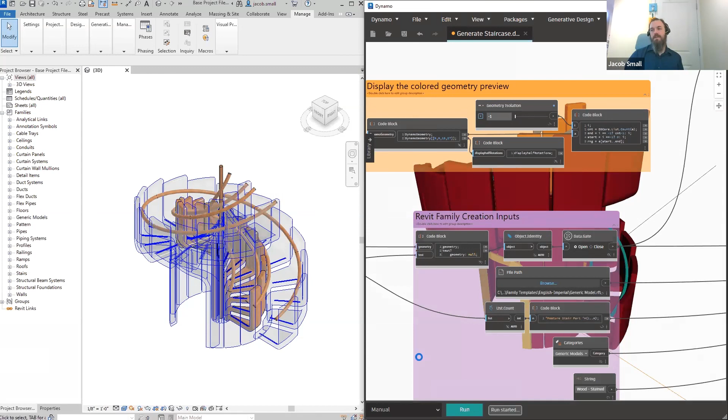All right, so last time on Dynamo Office Hours, because this is a continuation of the series, this is what we put together. We built a graph that would basically write all this up. I've sped this up a little for anybody who saw the last version, it did not go quite that quickly, but it did get all of that geometry created. I've pushed it a little further and took the lighting recesses and actually baked them in as well. We'll have a quick tour of the model when we get started and look at the actual demo portion of today's session.

All right, so we're going to talk through a handful of documentation pieces inside of Revit, in this case looking at all the cool stuff and starting with views. There's a little bit of nuance when it comes to the Revit API, and that is expressed in Dynamo as well. So the way that you build some of these things we're going to talk about are going to be conceptually a little different to the way that you might engage with them using buttons inside of Revit to do the same actions.

Because there are different ways to create views, you need to define how you're going to create that view. Some of these could be things like by level or by target in the context of a 3D view. You can conceptualize a 3D view being more like a camera - you have to say where it is, where it's pointing to, and what is the frame of reference that sits inside of that view.

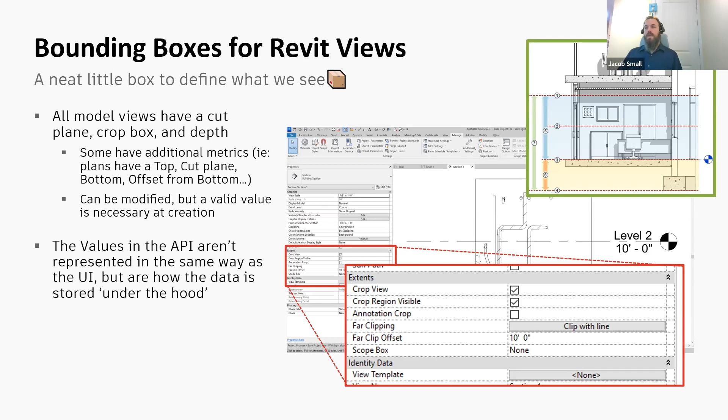To explain this, I started by drawing my best impression of a Monopoly house in Dynamo using as few nodes as possible. Any view, before we can create the view, we have to have something to look at.

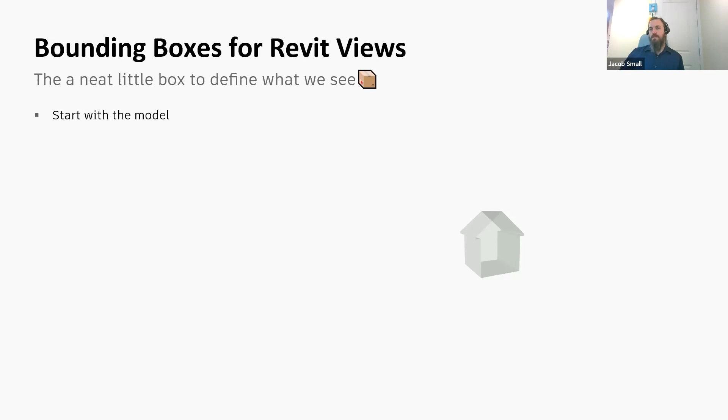So we're going to look at this house. And then we're always going to start by defining a cut plane. This is going to be defined by a coordinate system where the normal of the plane is going to be the coordinate system's z-axis, right? So that means our cut plane is always going to be that XY plane, right? You can see it there.

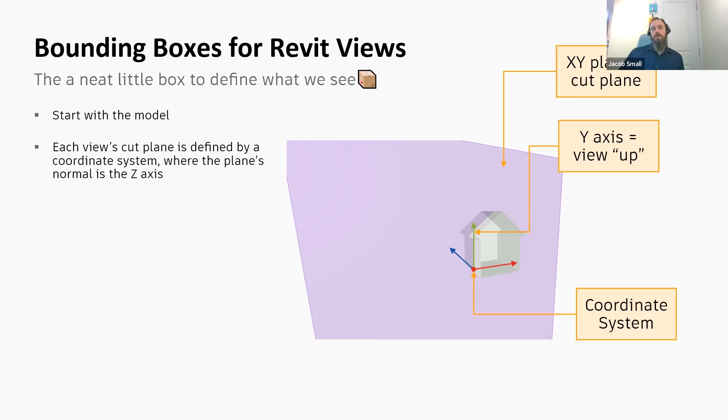So the basic parts here, we've got our coordinate system, right? The actual cut plane, which is the XY plane of that coordinate system. The Y-axis we want to be the up direction of the view. The X-axis is going to be the left-right direction of the view. Then from there, on that plane, we can define a couple points. And these points are basically going to define the crop box of this view, right? How big does this view want to be in terms of its width and length?

We're going to define that by taking the two X values of these two points and subtracting them, and the two Y values of these points and subtracting them. And that's going to give me the height of the crop box and the width of the crop box in model scale, not view on page scale, but in model scale. And then with those two pieces defining that crop box, again, you can see that min point there, the max point there, and the rectangular crop there. With those two pieces, I can then extrude it out to get a depth to actually get the view depth set up. And that's going to be set to my maximum Z value.

Now, is that all confusing? Yes, absolutely. No way around it. It is really crazy stuff because we're starting to talk about effectively defining a bounding box, right? Min point, max point, but we're not defining our bounding boxes on our standard global axis. We've always talked about bounding boxes as being XY aligned, XYZ aligned. That's no longer entirely the case. In fact, it hasn't been the case in Dynamo since, correct me if I'm wrong, 2.16, when we got the capability for off-axis bounding boxes, which is really cool. And it's always been the case inside of Revit.

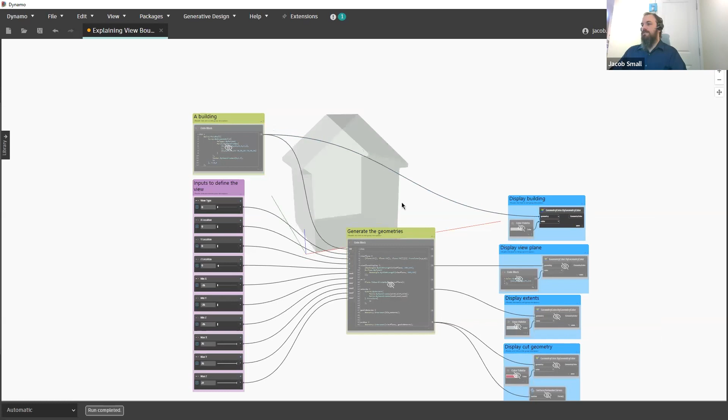So since this is confusing, should we do a demo? Yeah, let's do a demo, but just a quick one, I promise. We're not going to go super long because really all I have to do is open it up and explain how this is working, because the static images we showed before weren't necessarily great. So you can see I've got my house here. I'm going to turn off that preview, and we're going to look at this preview instead. This is going to gray that house out, make it translucent so we can see through it. And then from here, we have our different parts and pieces.

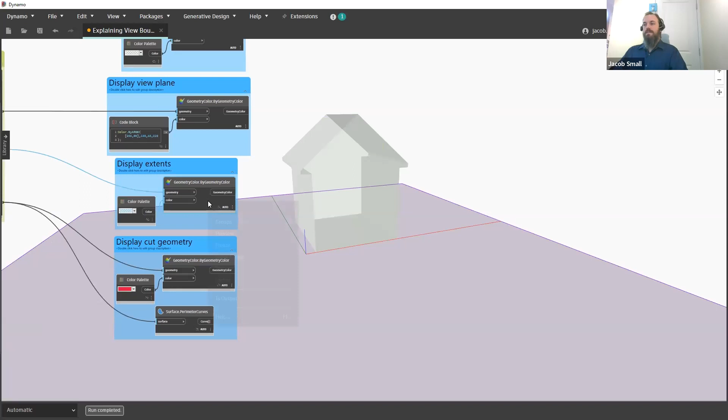So the first piece we have is our view plane. This is going to be our cut plane. We'll turn the preview on for that. I've currently set this up to be a plan view. Then we're going to display the extents on this plane. When I turn this on top of our plane, we're going to see this bounding box gets created. And that bounding box is in the direction of that plane. I know I said it's a plan, it's really a reflected ceiling plan. Sorry, I got that backwards.

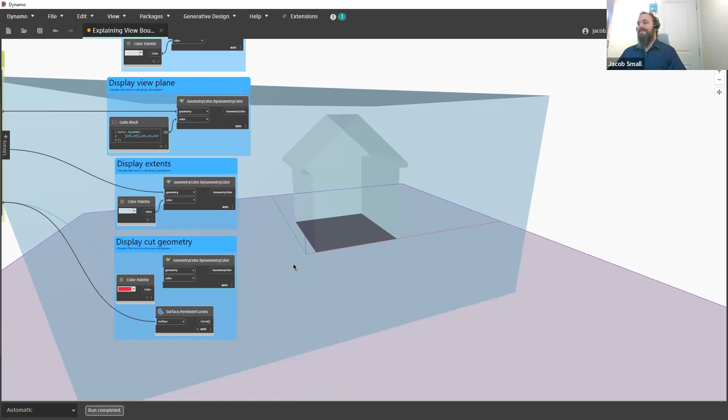And then last but not least, we're going to set this up to preview our cut geometry, right? And since this reflected ceiling plan is currently set to the very bottom of the house, we just get that static piece. Now I can change my view type. So instead of my plan view, let's change this here so that we get a section. You can see I'm now cutting a section right at the front of that house.

And now we can start to change our location data. So I can move my X location, and that's not really doing very much for me, right? It's shifting my bounding box around, but that's not really very useful. We can then take my Y location and adjust that, and that's going to change, not my depth, but my cut plane through the house.

And I'm not adjusting this on the local XY to the plane, but I'm adjusting it in the global XY. And then last but not least, we can adjust the height as well, again, on the global XYZ axis.

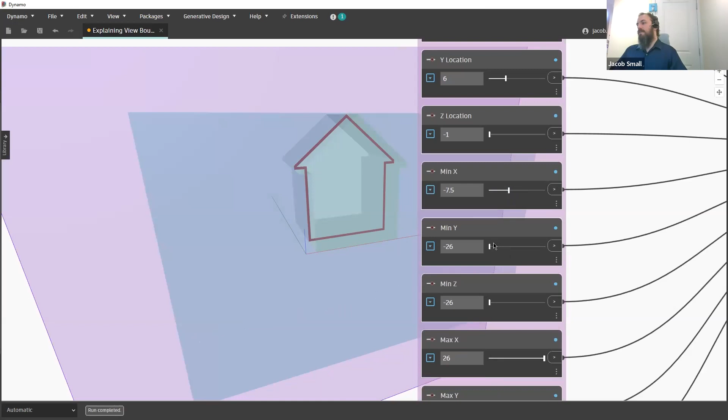From there, we can start to adjust our minimum depth. So we can take this piece and we can extrude stuff out. We can set it to whatever depth we might want relative to where stuff may or may not want to cut on its X, on its Y, and on its Z as well. Right. And again, this is going to change how far back we really see stuff relative to the overall scope of the drawing.

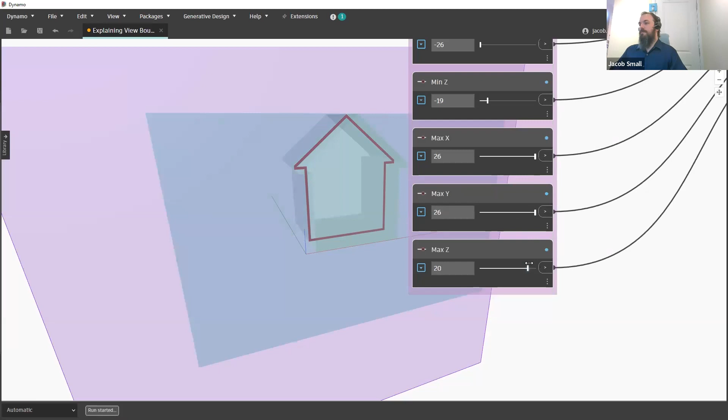Similarly, we can adjust the maximum depth for the X. So you can see we're not viewing all the way up through there. We're only viewing part way, maximum for the Y, and maximum for the Z. How far back do we want stuff to go? And that's basically how that content all works. So again, just changing that coordinate system will switch up our bounding box and allow us to view stuff in a different direction.

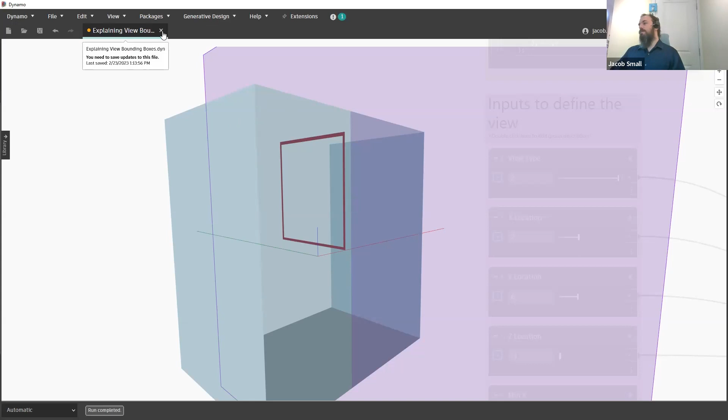So hopefully this all makes some sense. I know there's quite a lot to it, but it's really confusing without that. So I'm going to go ahead and close this. Won't save any changes, and we'll pop back over to the PowerPoint and talk about adjusting the views.

Right, cool. Thanks, Jacob. So what you might have noticed is Jacob has gone in a simplified version, recreated some of the tools that exist in Revit today around crop boundaries, crop views, orientation, and so on. So conceptually, hopefully that starts to paint a picture about the level of complexity that's required when you start to think about views and what that actually means. What content is in there, how big are they, what can you see, what is the orientation, and so on, which is why they're a little bit tricky to use inside of Dynamo.

But when you do wrap your head around them conceptually, they start to make sense, and you can start to do some pretty cool things, which we're going to show in the real demo later. So once you've created a view, you can also do stuff to the view. And so we want to really make them look good. So instead of just having a view created and you're good to go out of the box, it's not quite the case. We've got all of these things that you can see on screen here that enable you to do other cool things to them.

You can do stuff like setting the view scale, hiding or isolating elements, applying filters, setting the rendering style, and so on. There's a bunch of different aesthetic choices or detail choices that you can make to make your views look really cool programmatically.

And then the same thing with creating views, you also have the ability to create sheets. And this is around putting those views on sheets or putting things on a page. And sheets can also be created in a variety of ways. So we had about 2 different options out of the box today for creating views. And we have about 5 or 6 different options to create sheets out of the box too. So these options give you different choices.

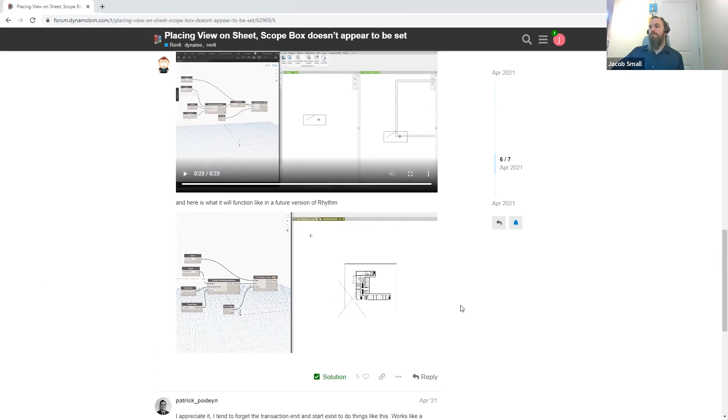The last thing to mention here is transactions. And transactions are, in particular, depending on how your nodes are set up. And when I say nodes set up, I don't mean your graph. I mean the authored nodes under the hood can have some pretty big impact on how stuff works. John Pierson actually has a great post on the Dynamo forum, which I think I might still have up. Yeah. So John, who I see in the chat, hey John, has a great post in the Dynamo forum showing how these transactions can

drive people nuts, right? So you can see here we've got an initial piece that attempts to set the crop box for a view and then place it on the sheet at the correct size. And it doesn't work the first time out. So he goes ahead and modifies it to connect stuff up a second time with that additional transaction node in there. You can see it's now placing on the sheet at the correct dimension. Now, the reason for this is things have to be committed to the database before they can be recalculated in many instances. And this is probably the most classic example of that.

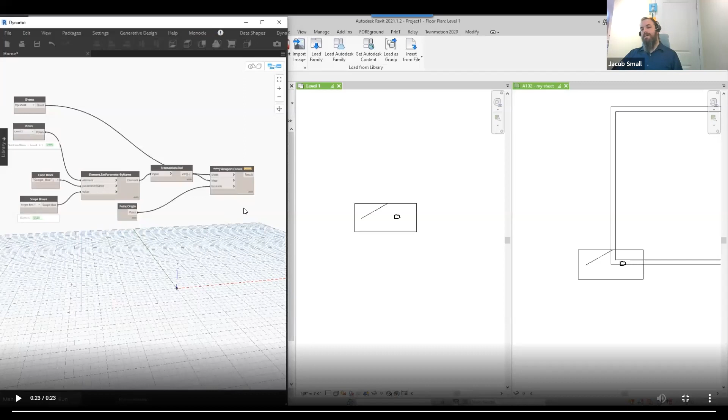We've seen it in other places around stuff like setting line style overrides for, not crop regions, filled regions. There we go. And stuff like that. So you will see that all over the place. And I will go ahead and put this in the chat in case anybody wants to do a little bit more research on it. Here we go. All right, cool.

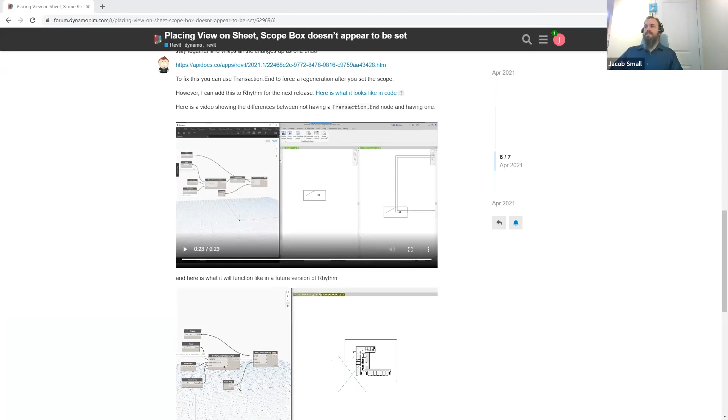Now, with that said, anything to add to that? Other stuff you can automate, Sol? No, there's a lot of nodes that exist in Dynamo for Revit. So please go have a look and see what you can do. There's also a lot of awesome things on the forum and a lot of awesome YouTube channels, a lot of awesome blogs and so on out there showcasing a bunch of this different stuff.

And also a big shout out to the package authors who create extended content beyond what we have out of the box too. One of those being John in the call, which we gave a shout out to earlier with the Rhythm package. Please go check out that stuff because some of those nodes collate numerous different steps into one, which can help fast track you to the end result. But the more granular approach gives you infinite control out of the box. You just have to understand how it works conceptually, which we've tried to illustrate a little bit today.

Cool. On the subject of packages, shout out to Andreas Dieckmann for the detail component by curve. I still use that all the time in my day-to-day work. It's one of those things like, how would I get by without this? So again, huge thanks to all the community members who make Dynamo the great thing that it is.

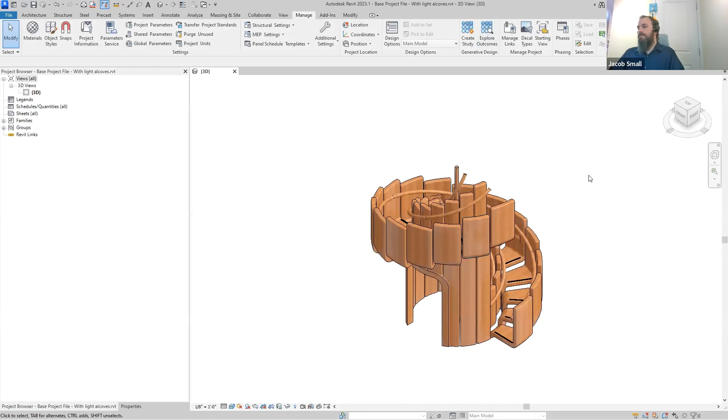All right, so with that said, let's pop over to our live demo. We're gonna jump over to Revit, and you can see here, we've got our stair as it was before with a few additional changes. In particular, I'm gonna go ahead and isolate this view.

Sorry, swapping back and forth between Civil 3D and Revit all day, so where's my isolate command, a little bit backwards. But you can see I went ahead and I inserted that light recess in there with the correct form, those additional cuts. It is still that solid element. So you can see it's got its solid geometry. It's set to render correctly and shows up well within our model.

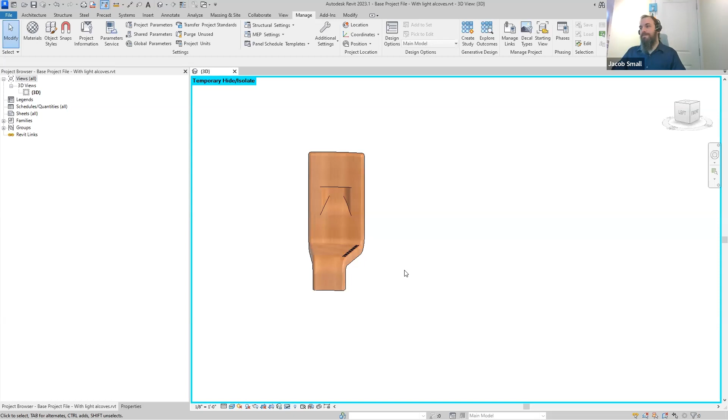But typically, we can't get stuff built directly from a 3D model, right? We've got to document what each one of these pieces are and put the specifics of it together. So let's start Dynamo to do just that. Where is my Dynamo? Here we go. And I'm going to open my pre-baked graph here, which is going to do a whole bunch of stuff.

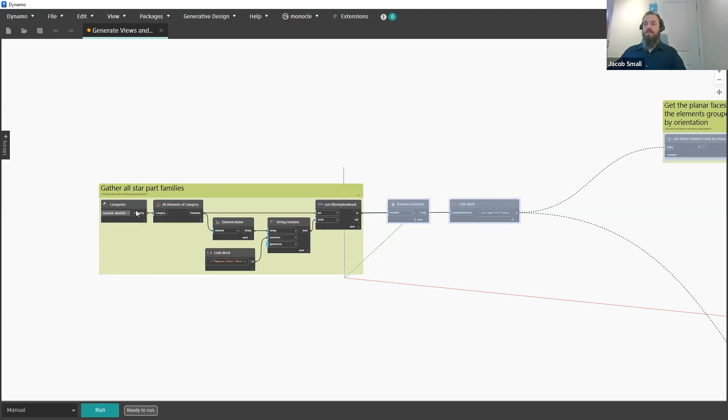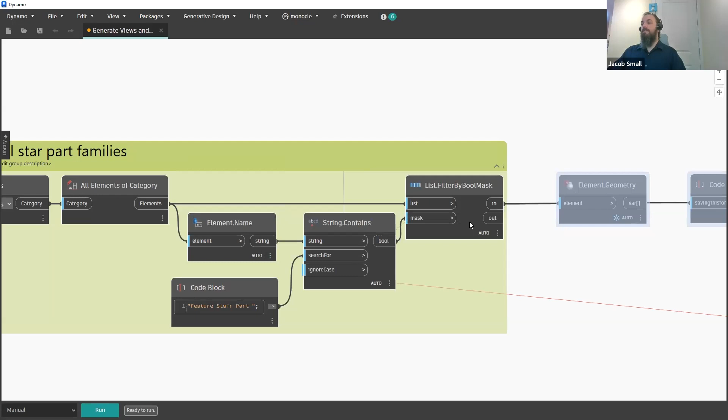And the basic idea, my map for this graph, I wish I'd planned on presenting this to you guys in hindsight, is we want to gather all the generic models for our stair. So we're going to take all the elements of category, make sure we get the stuff that's equal to feature stair. Then we're going to pull the element name from those elements, make sure they're equal to feature stair, filter the content out so we've got just the stuff that's equal to feature stair, right? So no matter how many pieces I have, because all of these families that I've placed have feature stair part as part of their name, it's a pretty quick and direct way to do that. And I can take advantage of this because I automated the creation of those with that name.

So I'm going to hit run. And I've got most everything frozen, so we're not seeing too much here, but you can see we've narrowed stuff down to just the generic models we want. I'm not grabbing the handrail. We'll work with that at another time when it comes to documenting. And then we're going to start talking about the next step here. So I'm going to turn on this node. We want to keep the preview on.

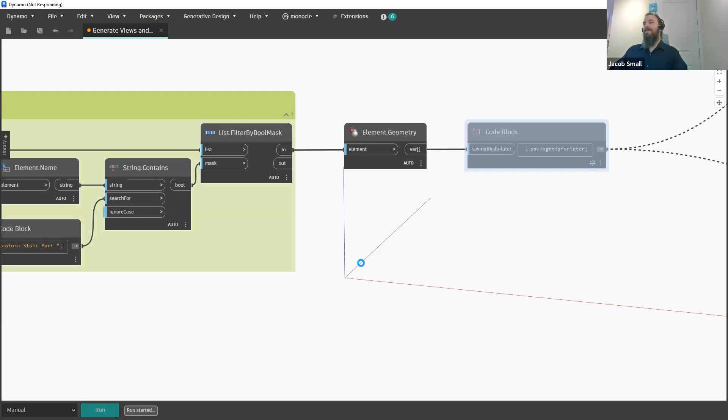This is going to attempt to pull all the geometry from our stair parts. So it's going to convert the solids, the surfaces, the curves, and everything else from our original element, from Revit geometry elements over into Dynamo geometry elements. And this is not where I expected this to freeze.

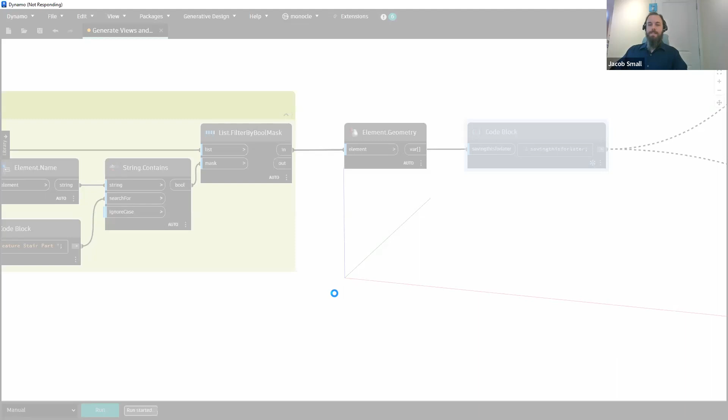Quick, Jacob, tell a joke. I don't have any jokes prepped this time. All right, there we go.

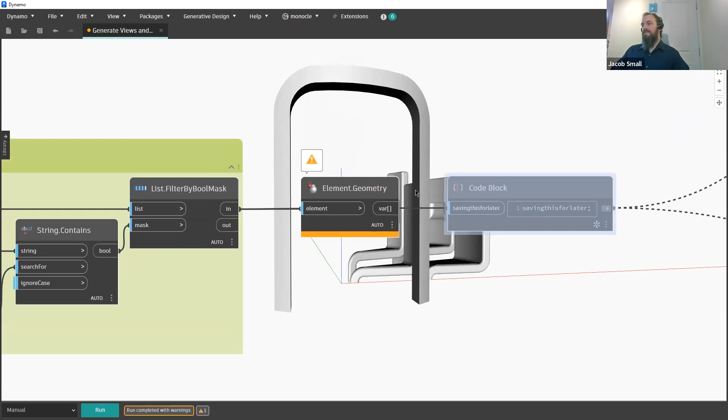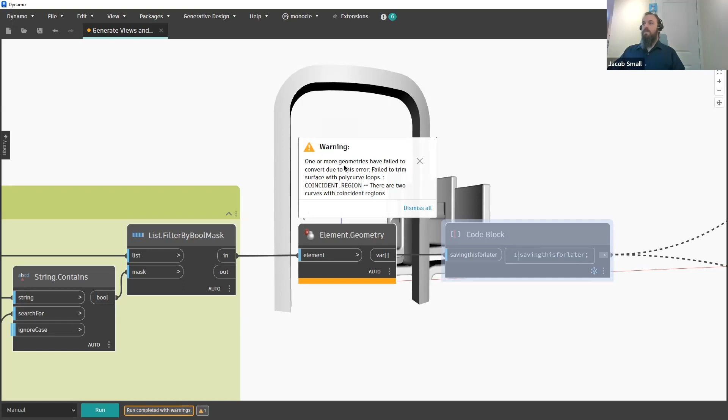Oh, wow. So it finished what it was up to, but not really well. I'm pretty sure I have more than 5 parts to my stair, right? And so what we're actually seeing here, if we zoom in and check our warning: one or more geometries have failed to convert due to this error, failed to trim surface with polycurve loops, coincident region. There are 2 curves with coincident regions. It's a whole lot of gobbledygook to most people, including me. All I really need to know is we couldn't convert the geometry, right? So we've got to try and figure a way around it.

Now, as a result of having 2 engines, we have to convert from Geometry Engine 1 objects to Geometry Engine 2. Obviously, something simple like a point, that's pretty easy, right? I've got XYZ data in Revit. I've got XYZ data in Dynamo. Really easy to bounce back and forth. Something complex like, oh, I don't know, my stair, it's got a lot more to it. So we're more apt to find breakdowns in these conversions as we get to those with a lot more to it.

So when our out-of-the-box geometry fails, one of the things I like to do if element.geometry fails, try to get just the data that you need. Since all I need is the top walk surface of my stairs, I can just move right over to element.faces and get that content. So my next step would typically be to try that.

I did. It also failed. So where do we go from here? Well, we don't just start crying and move on. We try and solve the problem. So when geometry conversion is a literal roadblock, I always go back to focus on my goal, review the map, talk about what it is that I need. Then I go into my Revit geometry options and look into the Revit API and sort of figure out exactly what it is that I'm after.

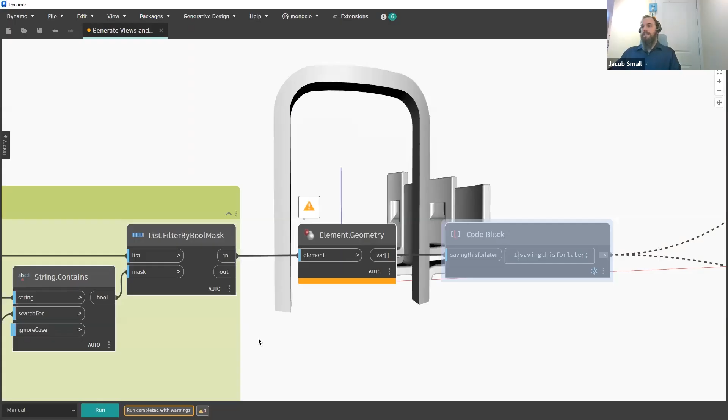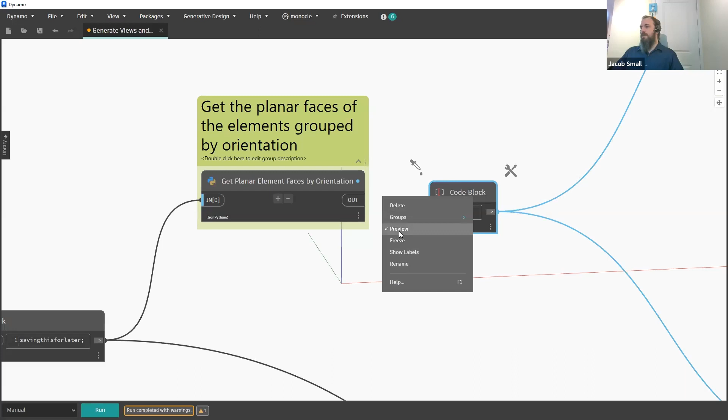So all of that said, let's pop back over to our live demo. I'm going to go ahead and unfreeze this and this. Didn't mean to have that one frozen as well. We'll go ahead and get rid of this failing node. And I'm going to turn on the preview for this. I'm also going to put a temporary holdout here so I can run this bit, but not everything after it.

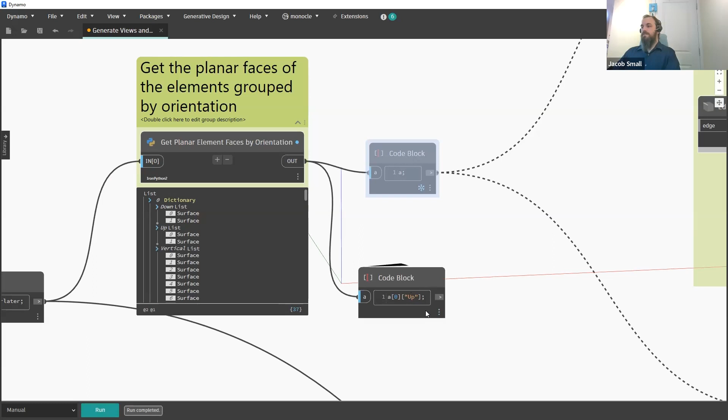So again, it's got collected all my stuff, pulled them out, and you can see the output of this is now a dictionary. So I can pull a list of dictionaries, pull these out, and then ask from that dictionary what's in the up portion of my treads. You can see that content kind of pulled out there. There are the only up facing pieces.

If I wanted to look at my down, there they are. If I wanted to look at the vertical, there they are. And I can do that for any index in this dictionary. That one's much taller than I expected. But with that, because I've got that, I can now continue about my graph.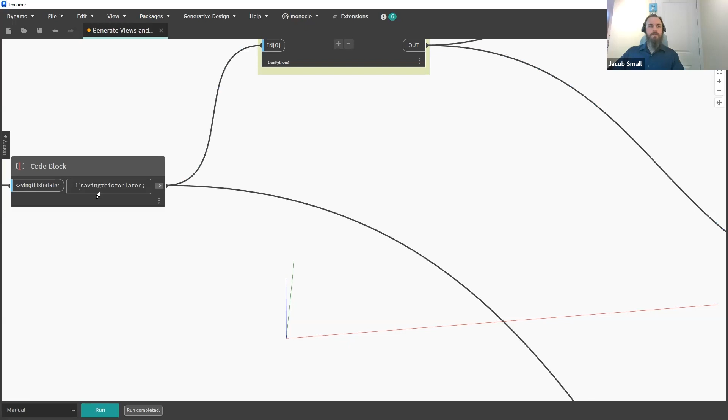So pull this over. How am I doing for time? I've got my camera hiding that. 34. Okay, we're good. We're good.

All right, so went ahead and ran. Didn't run everything, which is good because I didn't quite want to run all of that stuff yet. Or did I run everything? Well, that's interesting.

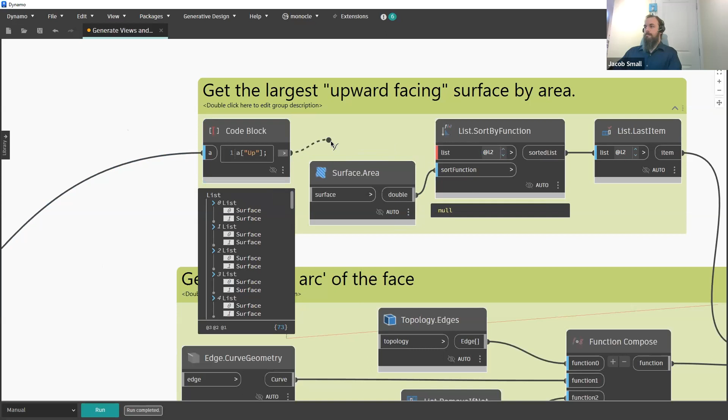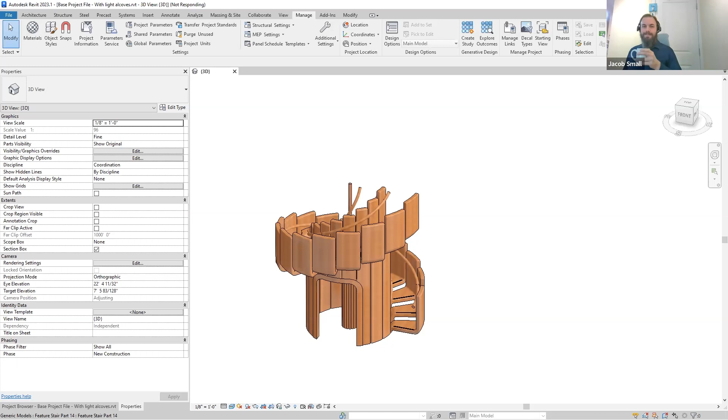All right, my virtual machine is in a bad state. So instead of having to reconnect everything, it is time to do a restart of Dynamo. I should have seen that coming when I had that unexpected delay. That's what I get for having the same Revit session open for a couple hours before starting a live demo.

So in the downtime, there has been some stuff shown so far. Does anyone have any questions or thoughts, insights about what you've seen?

Note that John does love the flashing white screen. Maybe not love it enough to keep it if we could fix it though.

All right, so skipping over this stuff, unfreezing this, running once more. All right, so this is doing a lot more work, which is what I wanted to see.

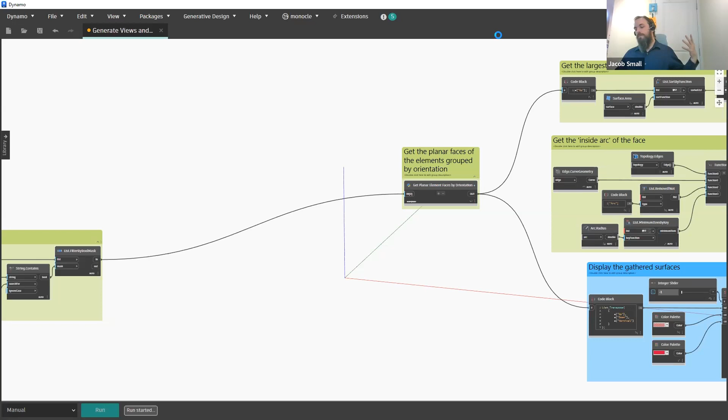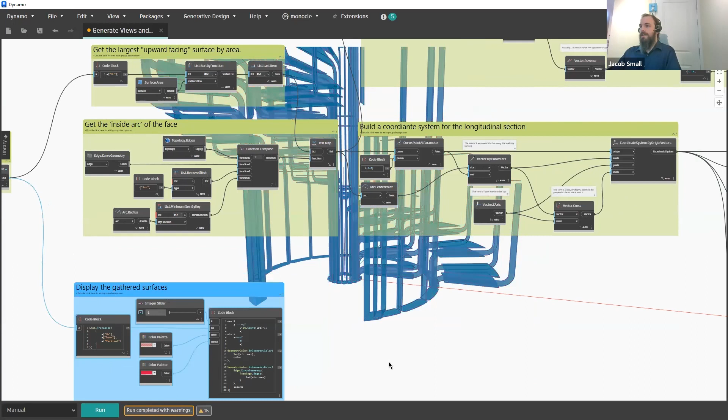So if we remember before over on my Revit model, I had very few things in there in terms of the overall sort of views in my project browser. Still nothing in here. We've got just our 3D view, but the key piece is within this content. I've sort of displayed all the gathered flattened surfaces that I pulled together there. I've built a few key functions here. So we're going to get the largest facing upward surface by area. That's going to be the walk line of the tread.

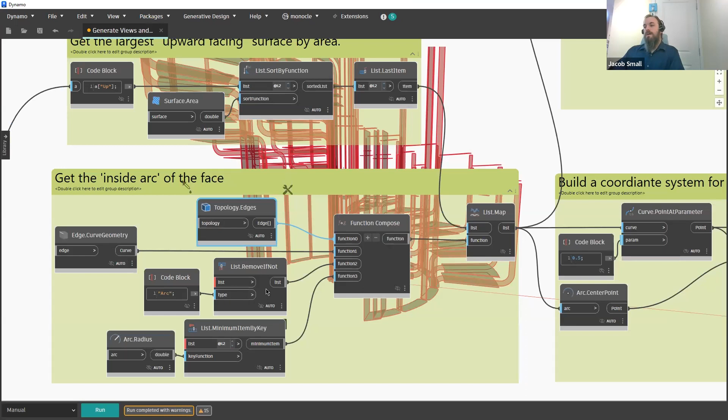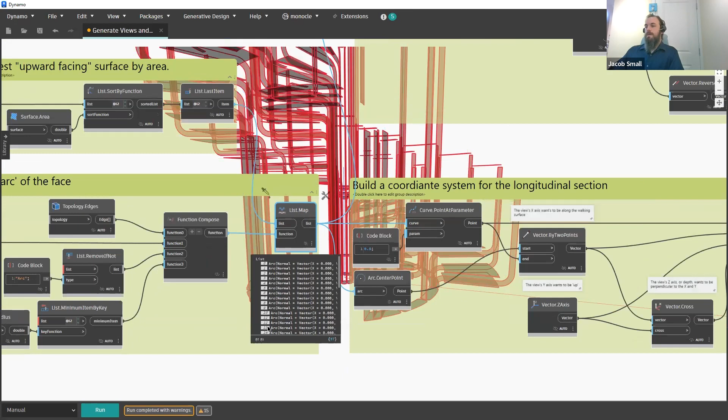From there, with those individual surfaces, I'm going to go ahead and get the inside arc of the face. The way I'm doing that is this custom function that's going to take the edges of the topology, convert those to curve geometry, remove if those pieces are not an arc, get the radius of the arc to give me the center point, or sorry, the inside arc for each one of those faces. I'm going to go ahead and turn off this display geometry so we can have a look at just what those are.

So there's those, you can see them there. And now if I come back and turn on this again, you can kind of see where those darker curves are all on the inside face of our other arcs.

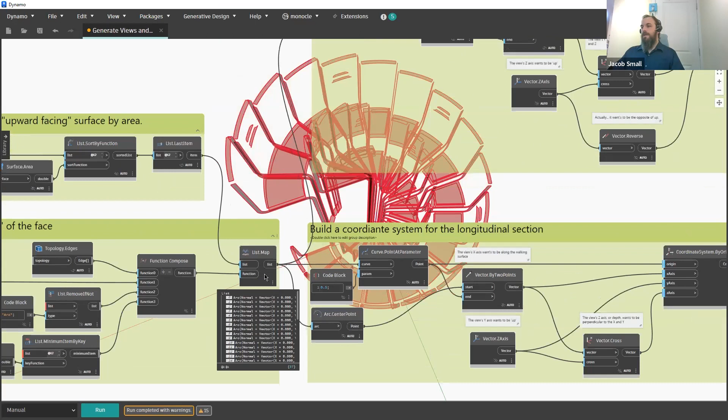So now, moving on from there, we're going to take those objects, get the center point of the arc, and get a midpoint on the arc, then create a vector by those two points. This should be a totally flat vector from the center point to the end. We'll pull the cross of that vector and the z-axis, then reverse that vector.

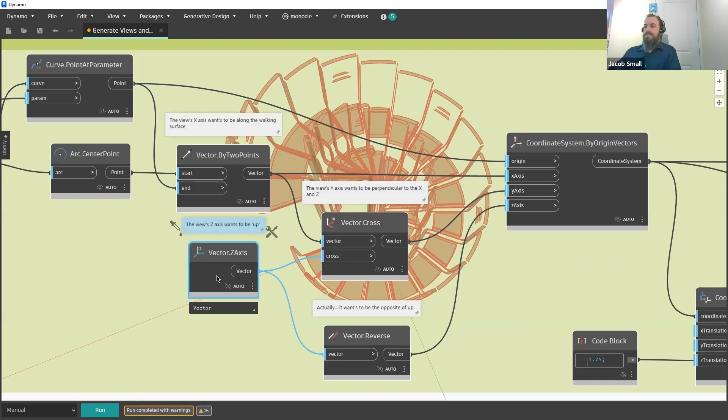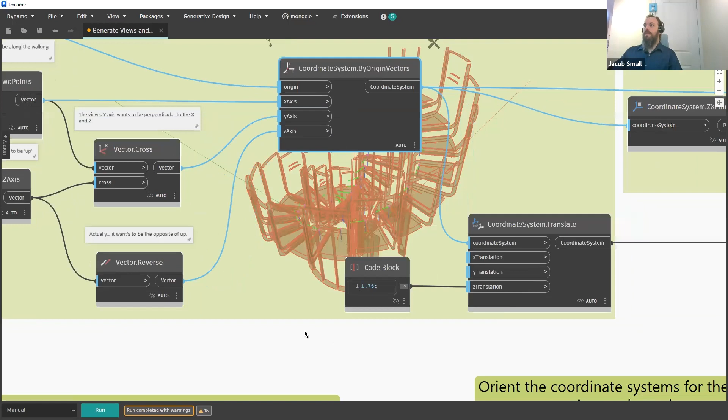The reason I'm doing all of this is I want to build a new coordinate system, and when I do that, that coordinate system looks like this. Remember what I said before, our z-axis wants to be the depth for all of our views. X-axis is kind of the red, and y-axis is going to be up.

I go ahead and translate that coordinate system, take its XYZ or ZX plane and rotate that coordinate system by 180 degrees to give me these coordinate systems. Now I've got coordinate systems on top of coordinate systems on top of coordinate systems. So let me go ahead and hide some of this stuff. We'll hide this as well because it's getting a little bit busy.

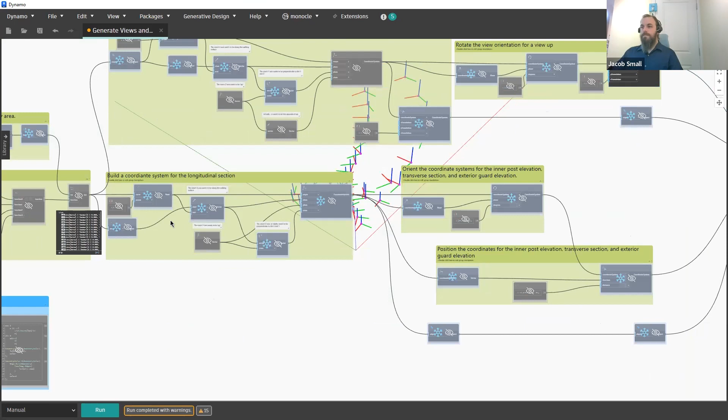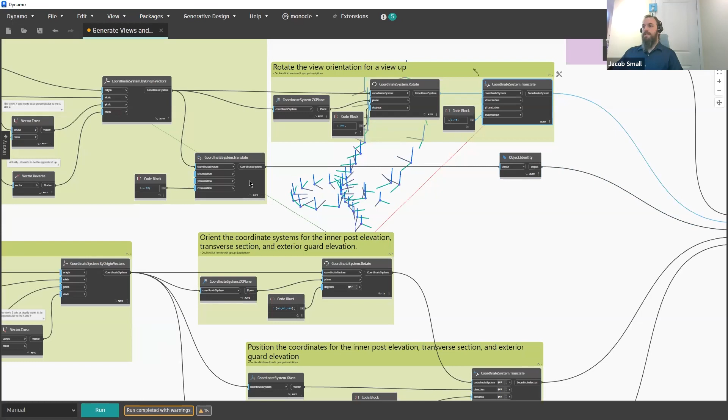And then with all those rotated coordinate systems, we can start to gather some stuff up. But before I do that, so these are going to be our RCPs - reflected ceiling plans, our plans were kind of down here, right? And then over here, we've got our sections.

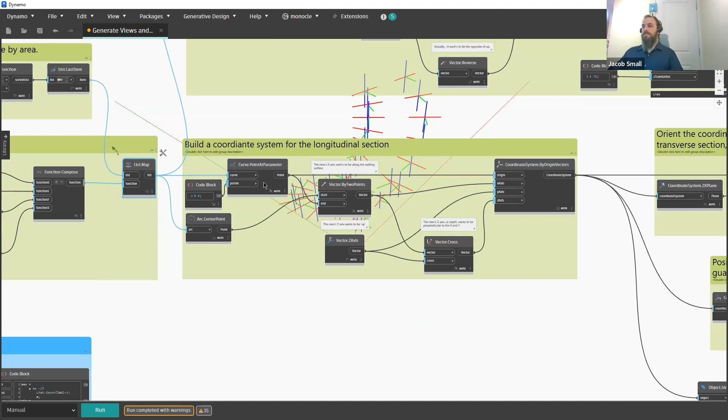So we're going to take, again, those same curves. We're going to get the midpoint and the center point, define that vector again. That's going to be equal to our x-axis. We're then going to take our y-axis and set that to be equal to our z-axis and our cross. Again, we're going to turn this on, and I'm going to hide these pieces here.

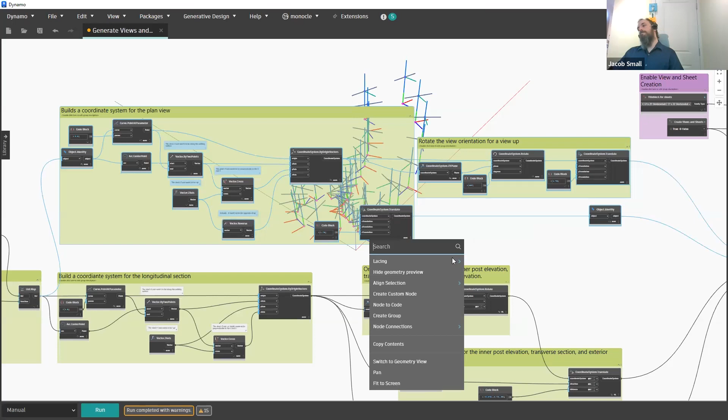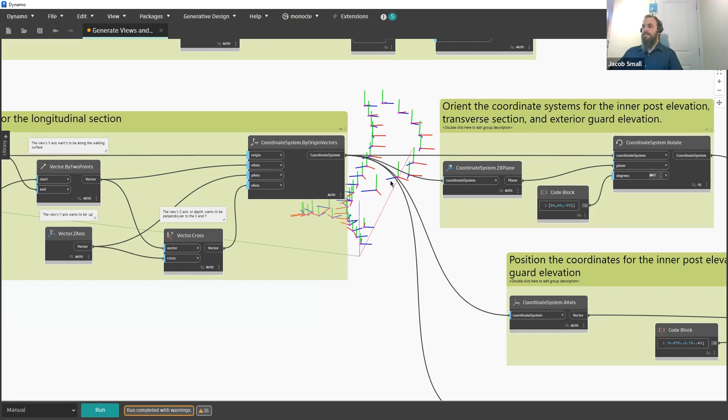And with these, those are equal to all my sections. So you can see we've got spacing from the middle of those points. If I come up into the top, we've always got something that's going to be perpendicular to the center of each one of those planes.

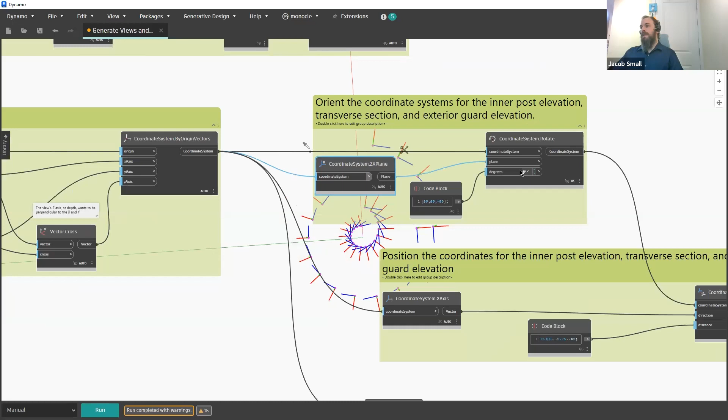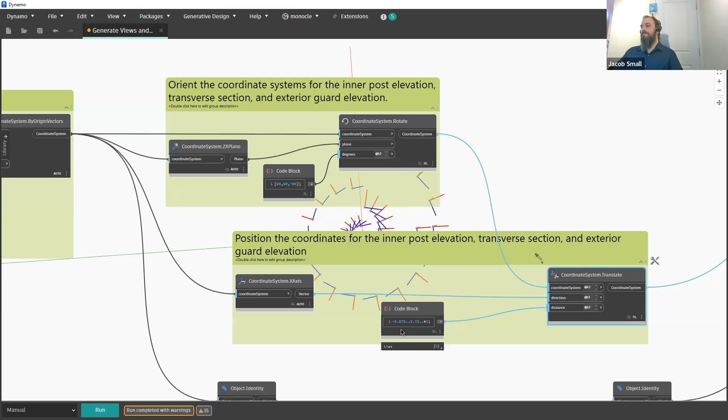We'll pull that ZX plane, rotate it 90 degrees to make sure - 90, negative 90, 90, 90, and negative 90 - to give myself a series of planes, and then translate it by some dimensions. These dimensions are basically going to be driven by the dimensions of my geometry.

You know, if I went backwards by 0.875 feet, which I think is like 7.5 inches or something like that - no, 9.5 inches, I don't know - that's going to go ahead and give me a point just before the center post for all my stairs.

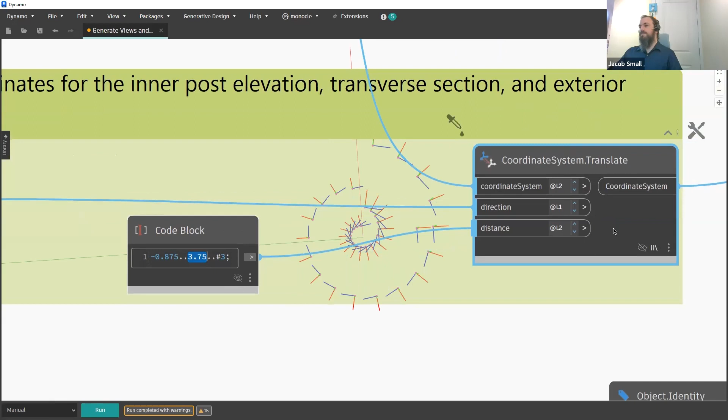If I go out 3.75 feet, that's going to give me one that's just beyond the end of my stairs. As a result, I wind up with one in between, and I wind up with all of these coordinate systems that I just turned on here. So we've got one that's looking at the inside face of my stair, one that's cutting through my stair, and one that's looking back at the outside face of my stair.

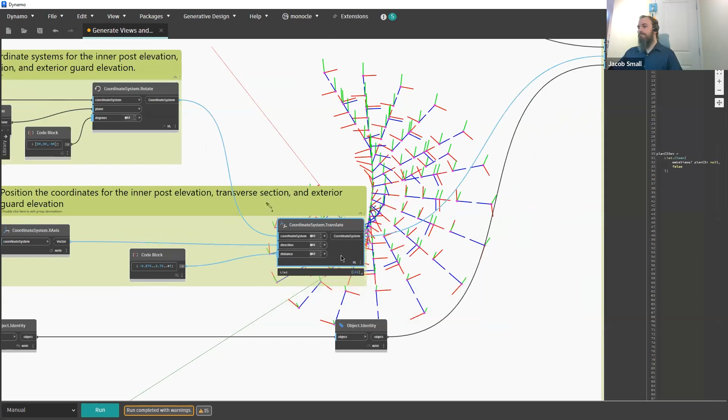And with all of those, we gather them up and then we can pass them on. But I did, as always, build a handy little create views and sheets. This allows me as a designer to go through and parse this content out to make sure it's showing up the way that I might like it to.

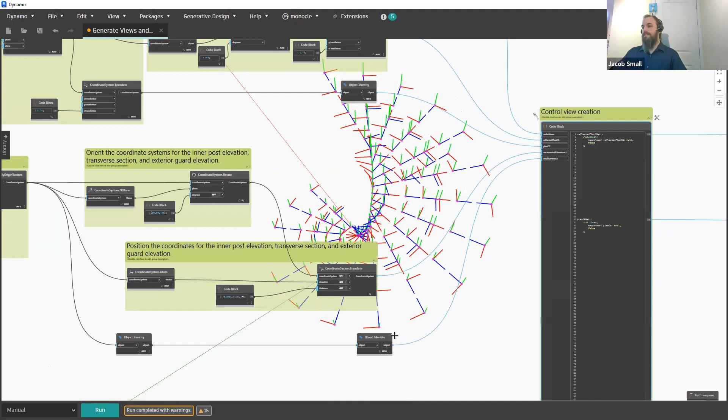I'm going to go ahead and hide these, and then we're going to get into the actual magic. Apparently I didn't hide everything. We'll go ahead and get into the actual magic here. I'm going to pull this off to one side and we can watch both our views and sheets, because what I'm going to do next is going to make both of those. Toggle that and hit run.

That was pretty quick, huh? So you can see here, we've got a whole bunch of sections that have been created. Right, 222, no sheets yet.

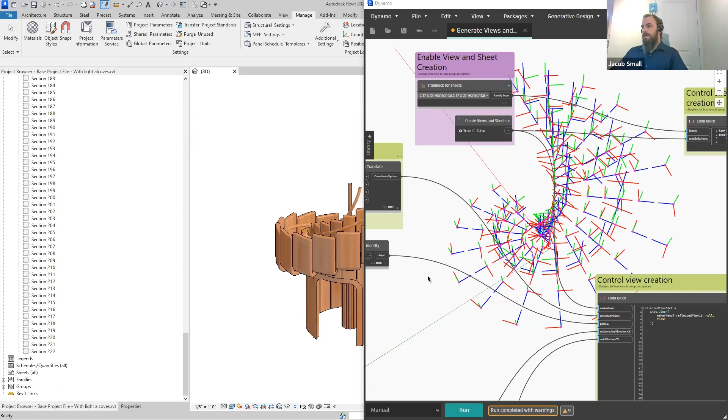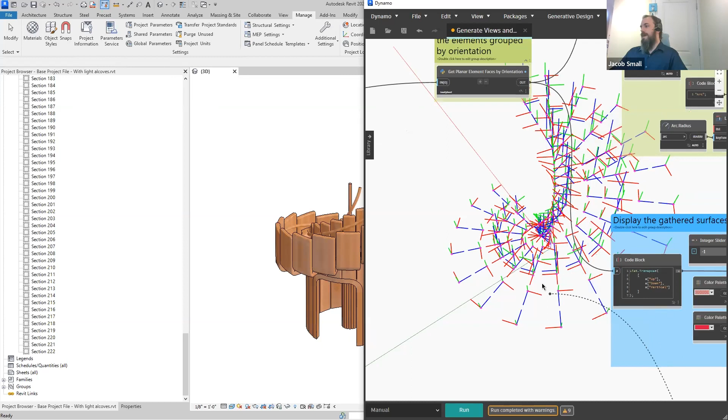Let me see if we can figure out exactly what went wrong there. Element.name is failing on our object identity, which is passing a function from - you deleted the connection to that. I deleted the connection to that, and I'm not sure what that was originally connected to. It goes to, yeah, the original box.

Here we go. Great catch - debugging on the fly.

Great eyes, Sol. Yeah, I took note of it when you did it. I kind of cheated.

This is the most amount of coordinate systems I think I've seen in a single graph, unless somebody's been trying to create coordinate systems on a surface and just playing with it, getting crazy numbers.

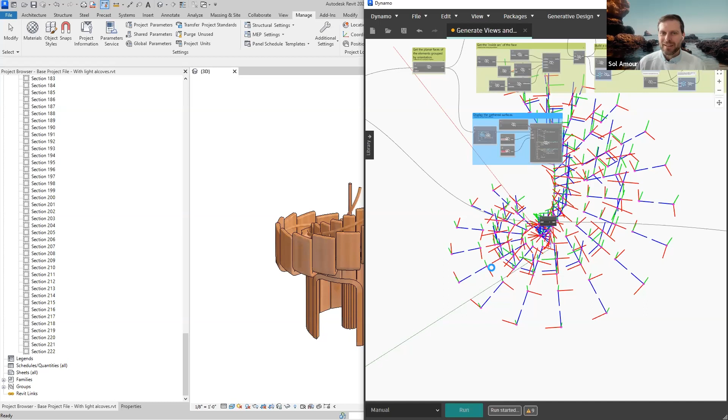There we go. All right, so now all my sections have been named correctly. Beyond that, they're all on sheets, and each one of those sheets has been named correctly. So now I can start to open this up, and we can see here what we've got. We've got our plan, reflected plan, our floor plan, our elevation at the interior posts, our section, cross section, our elevation at the exterior guard, and our longitudinal section through the entirety of the stair.

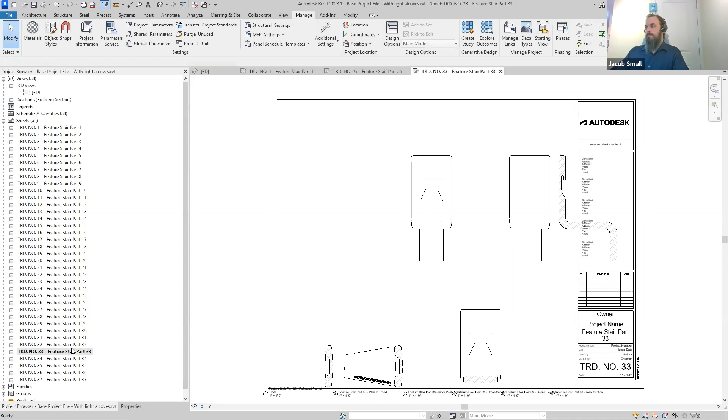And we've got that for all 37 different unique stair parts, which is pretty crazy. And you can see all the different sort of parts of the geometry are all pulled through.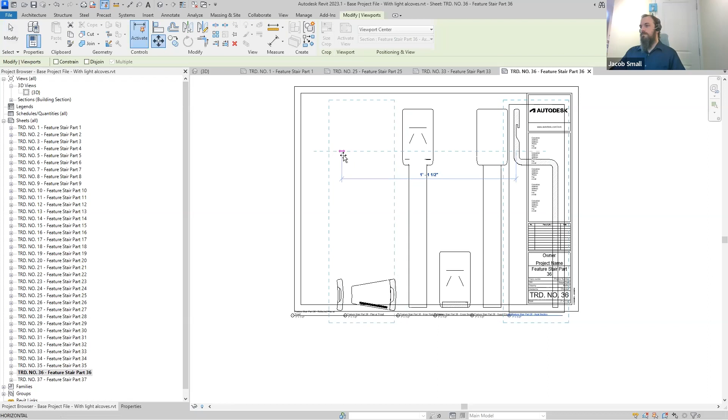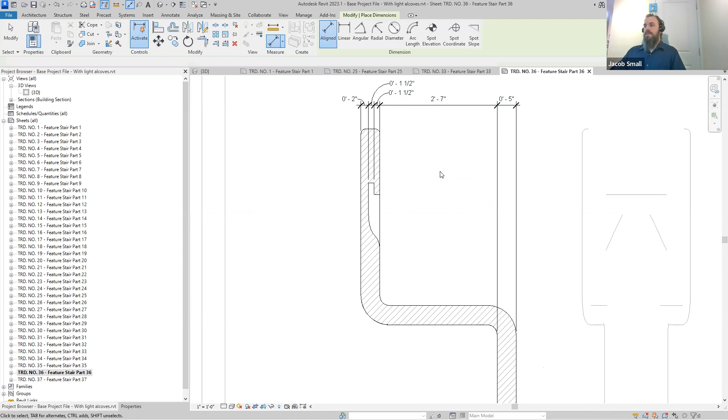And the other cool thing about this, if anybody's ever tried to dimension anything that's non-linear - I'm going to go ahead and move this, and we'll activate that view. Unless everything's perfectly perpendicular, you can't snap. And the likelihood of me being able to manually draw in all that stuff and actually get it perfectly perpendicular is pretty slim, but it just works here because it's computationally driven. It can't be wrong, right?

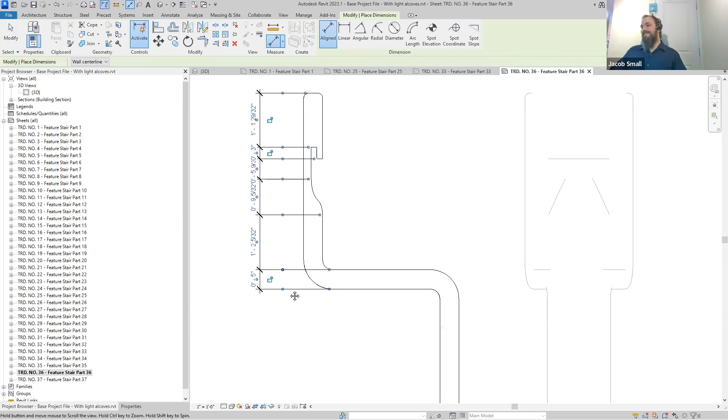Which is, again, one of those really big benefits to doing the work this way, right? And it's caveated with the fact that you use your logic or define your logic correctly. Yes, the logic does have to - great point - the logic does have to be set up correctly, but you can see it's all there.

And yeah, we've got some unique dimensions, but those were pretty much intentional because we've got crazy shapes that we were kind of after here. Maybe we might want to rationalize those back at the geometry creation phase, right? Move stuff up by 3/32 of an inch or down by a 32nd of an inch. I don't know which direction we might want to go, but it all does work, which is pretty cool.

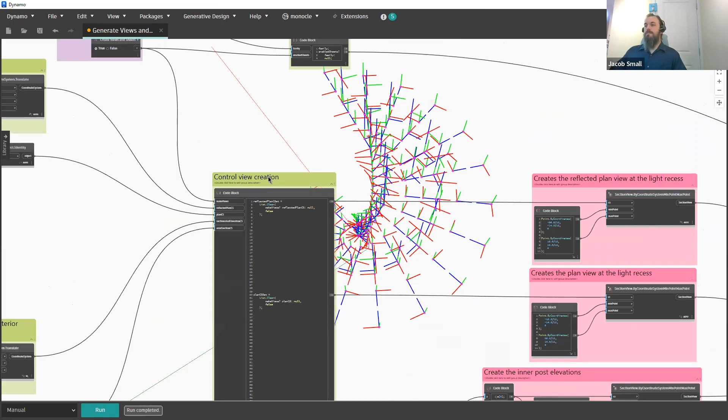All right, so back here, let's talk back about the graph, kind of what the different phases we're doing. So after I gathered all this stuff into the code block, this looks like a lot of work if I zoom out, right?

But in reality, all it's doing is saying clean the list. If make views is true, go ahead and pass the reflected plan. Otherwise we're passing null, right? And that was literally just done so I could have this true-false Boolean set up once and not have a million crisscrossing lines. So if that was true, we're going to go ahead and pass the coordinate system for the plan. If it was false, we won't.

So we've got our coordinate system coming into that section view by coordinate system min-max. We've got our minimum coordinates, maximum coordinates. These are hard-coded, again, based on the dimensions of my stair.

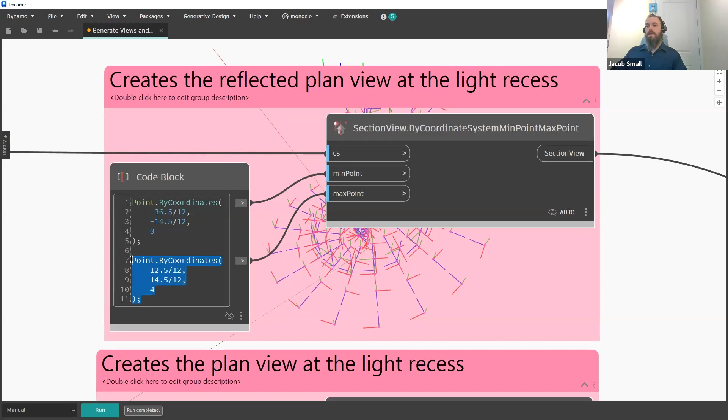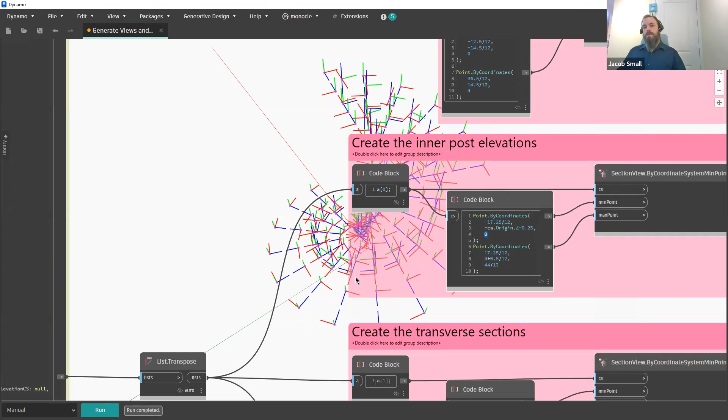That's going to get our reflected ceiling plan. Then we're going to go ahead and create the plan view. Then we're going to go ahead and create the inner post elevations. And it's all the same code, just slightly different, right? The heights on these might change, right? In terms of our minimum maximum point - like min point on my cross sections is always going to be 0 because I want that min point down at elevation 0, and so on and so forth.

So with all that content kind of set up and all my views created, we pass it on to the rename views. And that's just a whole bunch of management of my list, right? So we're passing the content through into view name plus elevation name. Our view name is equal to elevation name plus reflected plan at tread, and so on and so forth.

From there, we'll gather all those renamed views up into one list, transpose the list. So instead of having all my plan views together or ceiling plan views together or whatever, we've got everything by tread. And then we're going to go ahead and permanently isolate each one of the elements that we passed along from way back in the beginning that I disconnected originally in the view.

Set the view scale to 1 inch equals 1 foot. And then go ahead and place them on our sheet with the sheet by name, number, title block, and views. Might be nice to have set those up to sort of control the location on the view using name, sheet number, title block, views, and locations. But because each one of my sections was a different size, it didn't really make sense to just have a consistent point for all of those.

We're going to have to get a little bit creative with how we place stuff on the sheet just to make everything fit. So that's the workflow in a nutshell.

And I've got 13 minutes left, faster than I had expected, even with the crash.

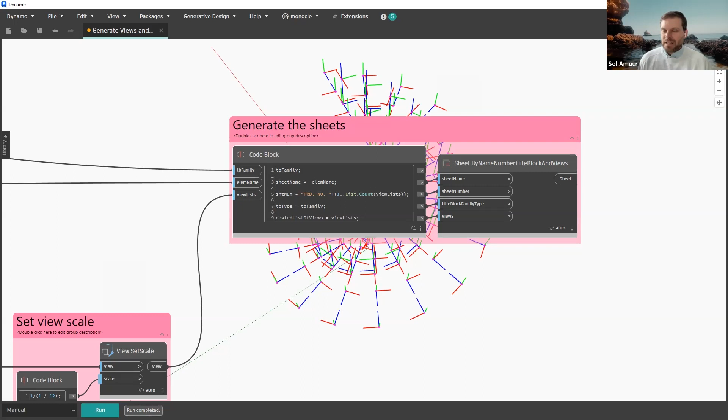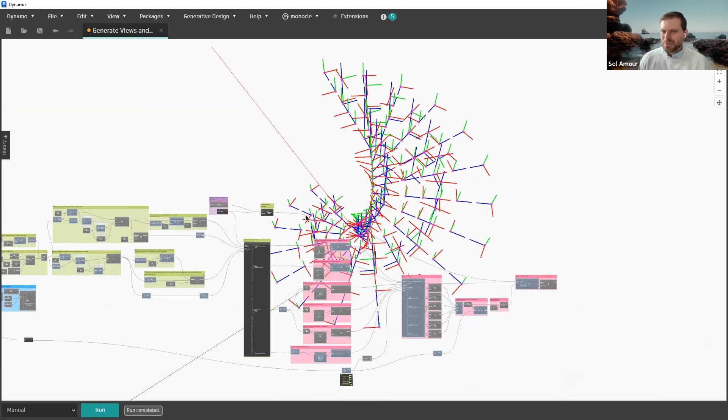So obviously we didn't cover everything. We noted in the presentation that you can do a bunch more stuff after this around the creation of dimensions. If you want to get really technical, you can do stuff like setting the aesthetics of the views and the sheets and a whole bunch of different things that we didn't have time to do in a 1-hour session here today. But the world is your oyster, and the benefit of doing this kind of workflow, especially if you set it up in a reusable way, is if you're doing repeatable components in your projects.

So you're doing commercial buildings and you want to do room data sheets. This is the exact same kind of workflow you would do to create a room data sheet. And that can be set from the center of a room and just reused on every single project you have after that, providing you test it on a bunch of different projects and work out the kinks or the edge cases that may exist.

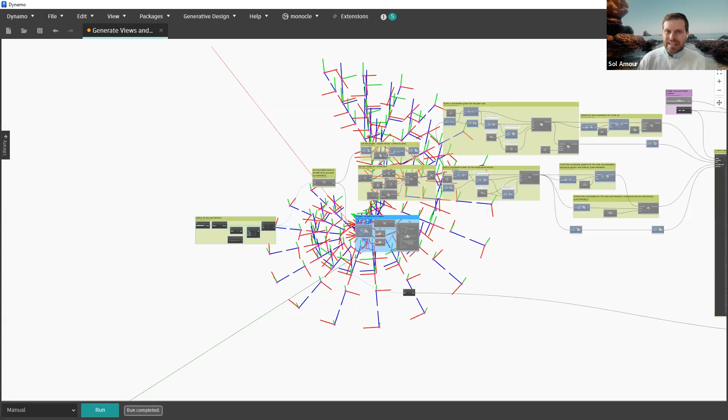And so you can start using automation to save yourself a lot of time and effort in the documentation phase, bearing in mind that it won't do 100% of it. This should be like a first pass. You should have yourself or somebody else in your office doing a manual check afterwards and adding in those elements that you can't automate today. Some esoteric dimensions, some of the overrides, some of the graphic or aesthetic choices that are not currently expressed in the Revit API, which means you can't access them in Dynamo, or not yet expressed as Dynamo nodes out of the box.

It's a great point. One area where I used to use this back when I was practicing is in documentation of kitchens, because they need a lot of sections, right? They need a lot of elevations, and you can sort of automate the creation of all those different parts and pieces pretty quickly, which is quite nice.

Yeah, this is more of a computational thought process as part of the workflow rather than the full piece. But there's a lot of education to be had from this approach. And some of the hard-coded pieces that Jacob has in here around the actual specific dimensions of things like the stairs, you could obviously do without hard coding. You could start pulling those more nuanced elements from, say, the dimensions of your geometry to get a more reusable format that wouldn't break if we make changes to the geometry. But in this particular case, it is relatively baked. So there's always choices to make.

Yeah, for the kitchen workflow, we did calculate that based on parameters of the elements and dimensions of the geometry, but here we didn't have parameters, right? I don't know what the height of these pieces are necessarily, and B, we don't have geometry that we can quickly pull over. Some content I was able to pull over, and that would be stuff like the height of the elements is going to be a consistent dimension above, so on and so forth. So you can get some of that content, but not necessarily all.

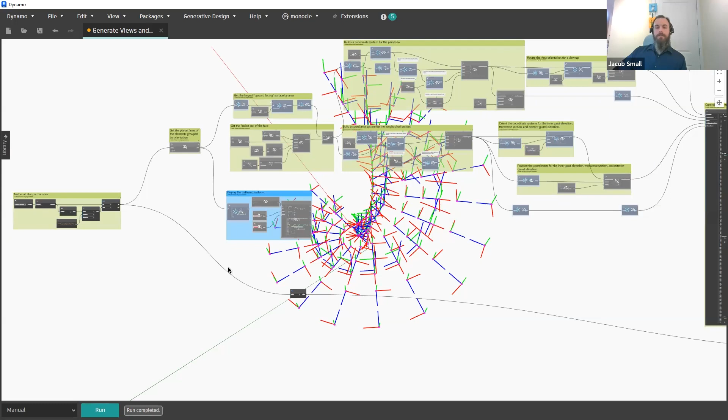Yeah, we have notions of large scale operations. So you can think of things like building metro stations, building massive MEP projects where there are tons and tons of rooms looking to dimension the same kind of elements together.

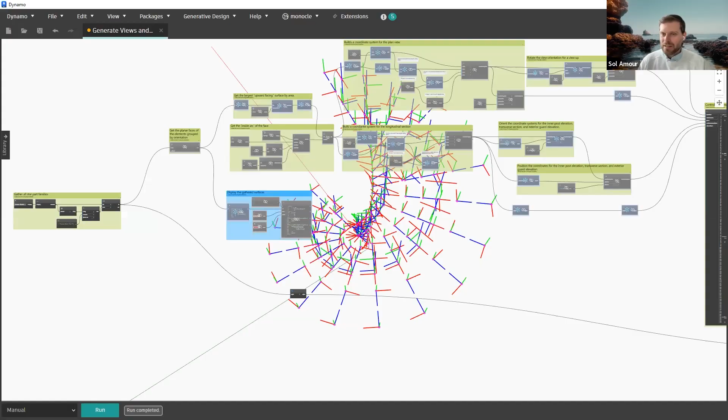And you can talk about weeks and weeks and weeks worth of effort saved by using an approach like this. Large joint venture projects around the world, the higher end, the larger end of the scale, we might be talking like 3,000 different sheets you have to create to dedicate to different elements or pieces of a particular complex building. And automating the process of creating that is huge when it comes to saving time, and time is money. So a big win all around.